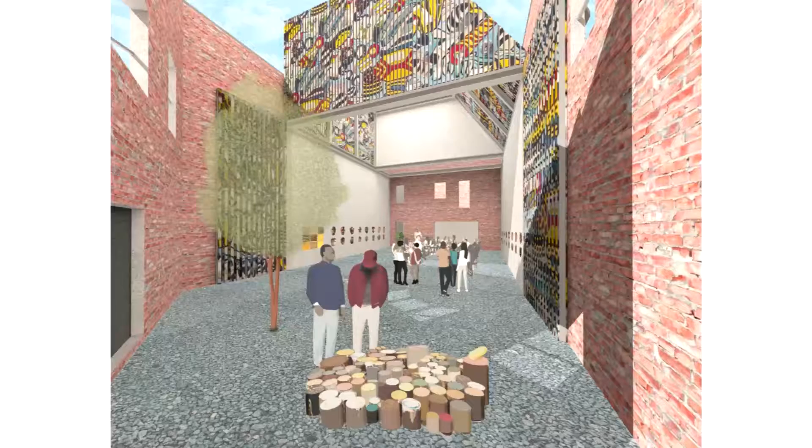For example, this is a museum we're working on in Detroit called the African Bead Museum, an extraordinary project that was falling apart. It was given by artist Olayami Dabls, whose commitment to creating gathering spaces for the community in Detroit to educate them about African culture was extremely important. So we're collaborating with Dabls on this project.

These projects are talking about issues of strategic voids—these void spaces, or open spaces in buildings, whether outside or inside. This is a building we actually implanted in this structure. The roof on this existing structure had fallen down and collapsed, so we cleaned it up, and we're now under construction on this solution we're going to produce. Strategic voids create opportunities for social interaction defined by carved out open spaces. How do you look at it from a different context? This is one of the tools that we use.

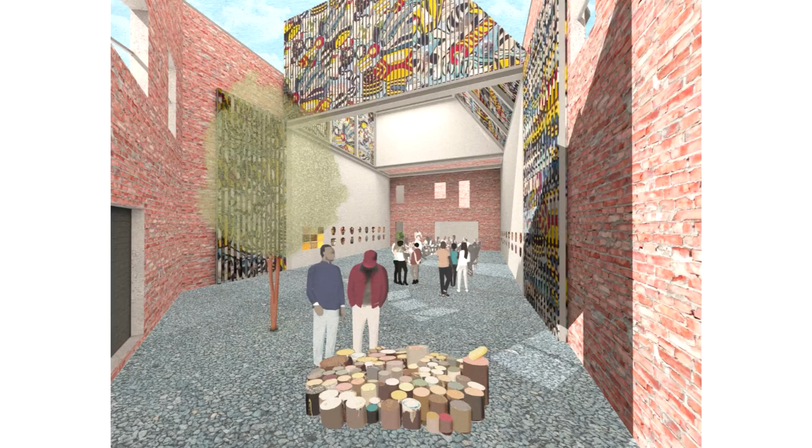Not only are the corners being eroded away, but in the middle of the building we fold things back, we fold the podium down to the street, and these efforts to activate it really work well. When you think about downtown Dallas, or other cities, they have great buildings, but how do you activate it? How do you create an environment that encourages people to come there? Our argument is if you activate it through program and through architecture, that will create a way of enriching and inspired spaces within cities. This is something we apply to all of our projects.

Equally, we look at the idea of unique materials. These are some bus stops we did in the city of Santa Monica, exploring how to rethink the convention of bus stops. Bus stops, in a sense, are hidden infrastructure—small infrastructures that no one ever pays attention to. We think that's an interesting concept, and in a way, a challenge: how do you take a very simple idea of a bus stop and push it further?

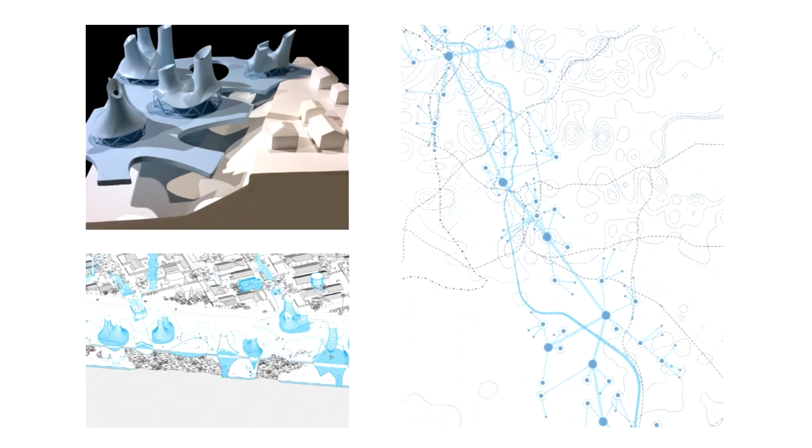I know you also deal with issues of drought. That's always been intriguing to me, to think that Los Angeles is in a drought. It doesn't rain for 5 years, and when the rain comes, they only capture 2% of it. Whereas if you can capture it in some manner, it means you can use it when you have the other 5 years of drought, which is going to come right after the rains.

These are billboard structures. Billboard structures are the ones you don't notice - what you notice is the advertisement. We were approached by the city of West Hollywood asking if we'd be interested in designing the structure for billboards. We thought that was a fascinating opportunity.

So they were quite nervous until Apple approached them and said, 'We love the design of the structure. We would like to have a 2-year lease contract with you. We want to give you $40,000 a month if we can use this billboard structure.' So my clients loved us. So we are now going to quit architecture and do billboard structures. That's one way of engaging Apple.

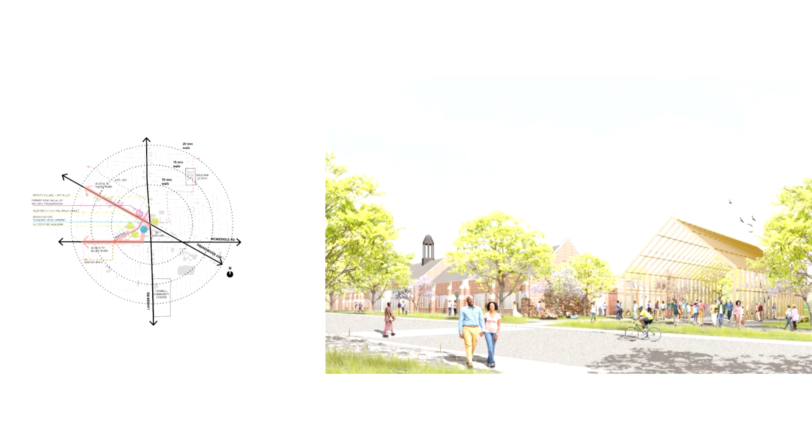Equally, we're doing two different studies for the city of Detroit. They've commissioned us to look at a 6 square mile area of northwest Detroit. Detroit is going through this profound transformation - it's something I'm very excited and honored to be part of. We're doing 10 projects in Detroit right now, and it's been very important to us.

We're learning so much working with people in Detroit, including the planning commissioners, this wonderful man Maurice Cox, who's become a friend and colleague over the years. I know he lectured here a few weeks ago, I believe. Maurice is heading up the planning commission - he's the head planner, and he's looking at this idea of engaging the neighborhoods.

It's a way of reutilizing and reformulating these buildings. Schools are gone. Public schools in Detroit have no money for teachers, so people went south, and now they have charter schools. It's become the primary way of education in Detroit. We think we can bring back some public schools.

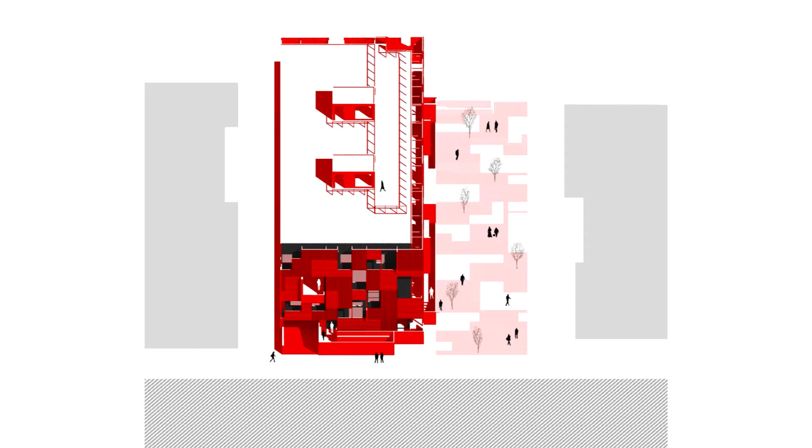With that context, we tackled this project in an unusual way. On the actual site was this existing house. The city approached us and said, look, you have to keep that house—we're getting a lot of pushback from neighborhoods. They don't want you to tear down every house and build housing projects.

We looked at this house and said there's very little architectural significance to it. So we came back to the city and said, look, it doesn't benefit the city—it's a crack house, not a very good location. Neighbors don't want it, but the city wanted us to keep it. So we became strategists and proposed an alternative strategy that they would agree to, so we could remove the house.

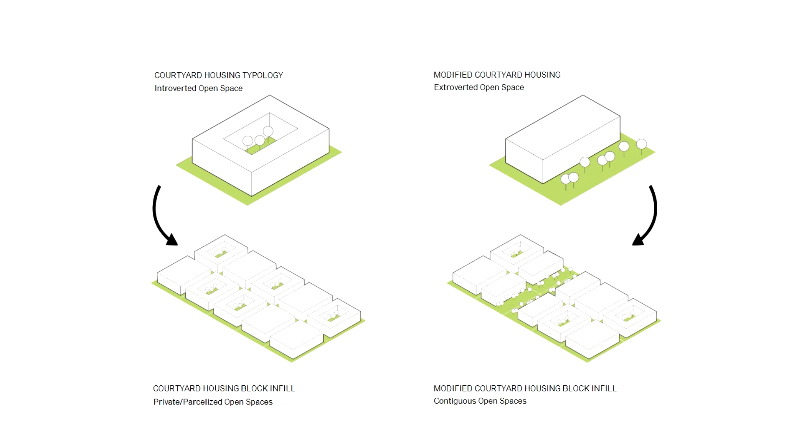You then might have an 80-foot by 300-foot green space swath, which suggests a different way of experiencing the city. It also means you can walk to a park. Most green space in Los Angeles, you get in your car—you go to Griffith Park, the beach, the mountains. You can't walk. So the idea is, can you change that by creating these pocket parks throughout the city? That was our goal. Ultimately, we tackled that idea.

Another issue quite important to me was the idea of context. I don't know about Los Angeles, but context is a strange word—there isn't much context in Los Angeles in one way, but there is in another. We feel that our context for this building was this cafe, a very renowned cafe called Formosa, and it has a personal, sentimental connection to me.

My dad, who was a film actor, used to frequent this restaurant with Orson Welles and John Houseman. He was there in the early Mercury Theater. It was a great time in Hollywood, and this cafe is where all these actors would go to brainstorm and chat about what they were doing. So when I got this commission, I used that cafe as my context, my cultural connection to the area, and the context was color, as unusual as it sounds. That was what drove this project.

I'd also mentioned this intriguing idea: how do you create a pocket park, a public space on private land? And also, how do you deal with parking? Our argument was you can tuck the parking for the private building, which you see on the right-hand side, and then have the park above it. So you can accomplish it—you have this hybrid program of public over private space, because frankly the parking is private, it's for the building, and the park is for the public.

So we approached the city, they loved the idea, and then we had to negotiate with them as to who's responsible. If you have a public park on private land, and the private land is owned by the building owners, but the park is run by the city, what happens if someone breaks their leg, or God forbid, something happens and someone dies? Who's responsible? Well, ultimately the city agreed to take the responsibility, and that was something we ended up doing.

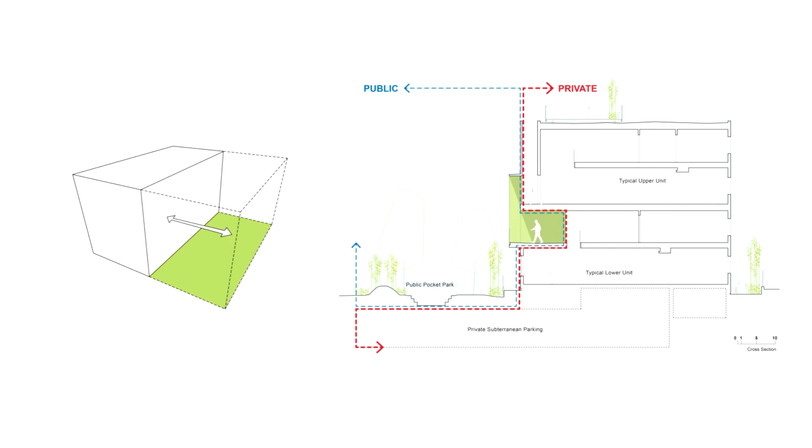So here is the architect as a strategist, an architect coming up with ideas that rethink convention. There are very few public parks on private land in Los Angeles—it's a very privatized city, and people with their own land want it for themselves, they don't want to give it to the city. So this was an interesting win-win situation, both with the city and with the client. He was able to build his 11 units, and from an architectural standpoint it was fascinating to be more of a strategist and not simply an architect.

And that's just a view of the project right there. You can see that we parceled a third of the building for the pocket park, which is for the surrounding community—here's two people walking in it. This benefits the tenants who live on the property, because what they get to look out on is a small pocket park as opposed to a building five feet away. That's the intriguing concept.

How can you as an architect create these opportunities that have a social civic connectivity? How can you embrace the idea of aesthetics? How can you look at context and culture in a different way?

Ultimately, this was the solution. There was a little bit of pushback early on. People were arguing the case: do people really want to live in a red building? I can assure you they do. This sold very quickly, and it became more of an iconic building in West Hollywood right now because there aren't very many buildings.

Not only this color, but also working with the nature of the metal exterior. So this was a very exciting project for us. And there's a view from the building next to it, which also looks at a park.

So you imagine the nature of urban infill. If you provide these 40 by 100 foot green spaces, it benefits not only your building, but the building next to it as well, and eventually the buildings on the backside. So it's a very interesting concept.

We managed to get 11 units. The city allowed the developer to flush out the street level. These type of 4-story buildings, you're supposed to step back 10 feet at 18 feet. So he was able to get one more unit by flushing it out on the exterior. The return was the city got a park, and the developer got one extra unit.

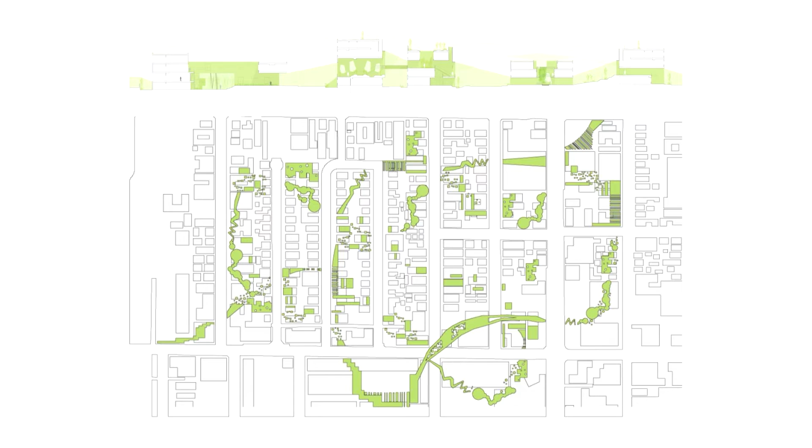The next project is for a developer, a colleague of mine named Jason Reynolds, who is a Dallas developer. Jason hired us in Los Angeles. It's Phoenix Property Partners, I believe is the name of the firm. Jason approached us after 3 years working on this project in Westwood.

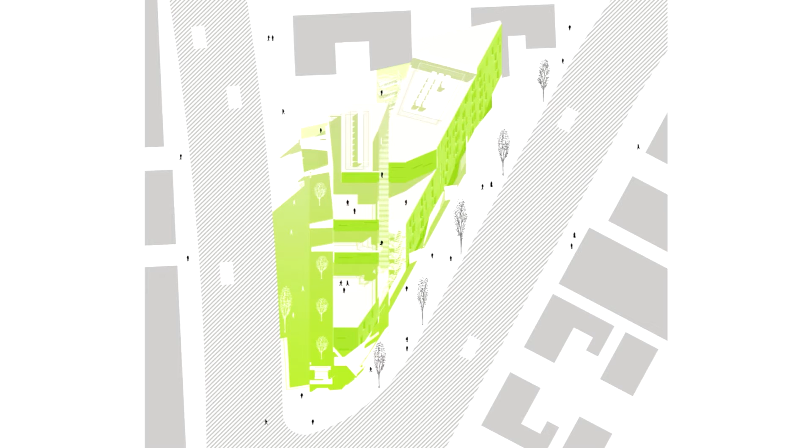It was to be student housing for UCLA. For 3 years, they were stuck in the architectural review board process and the planning. They kept rejecting the previous solution because of one of the key issues of the site—you can see here in a very abstract way, it's a wedge-shaped geometry.

That's the site. And what was most interesting was that there is a historical landmark house by Richard Neutra, called the Strathmore Apartments, right next to it. The previous solution proposed here was a 6-story continuous building. The Friends of Strathmore Apartments, the community activists, fought against the building because they didn't want to walk out of their 2-story structure and look at a 6-story structure.

So Jason tried for 2 or 3 years to get through with the previous solution, and to his credit, he cut his losses, interviewed a number of other architects, and ended up selecting us, saying: can you solve this problem? How do we get approval through our ARB and through planning, and solve what we need, which is 150 student beds?

So our solution in doing that was—here's another shot of the site. It drops 50 feet considerably from one end to the other. That's the site, and you can see on the right-hand side is the Neutra building, right there. This is one of Richard Neutra's multifamily projects.

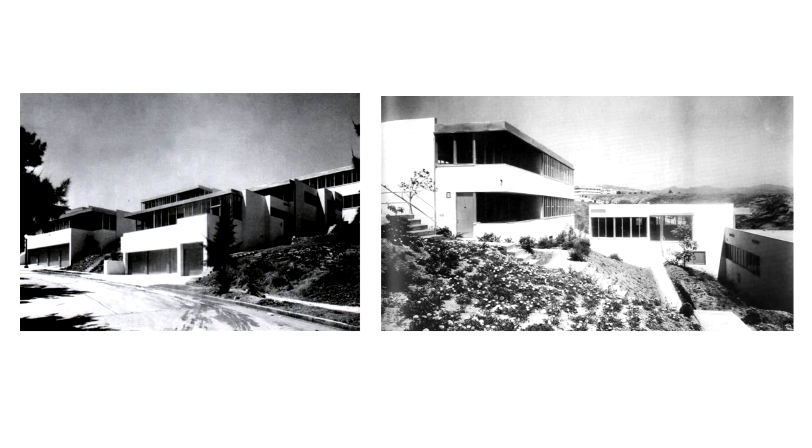He was certainly known and celebrated for his houses, but he was also very involved with larger scale housing projects.

And this was a step massing up a hill, 2-story volumes, and that was the driving force in terms of the massing of what we did.

So here you are engaging, learning from adjacencies, but really honoring this adjacency. If a building you're building next to is good, you can absolutely embrace it and understand what it's trying to do, and build a project that engages and honors that building. So we did that with this project, absolutely.

This one wasn't about color. This is about the massing of the Neutra project. So that shows you the site. That's our building. You can see the Strathmore Apartments.

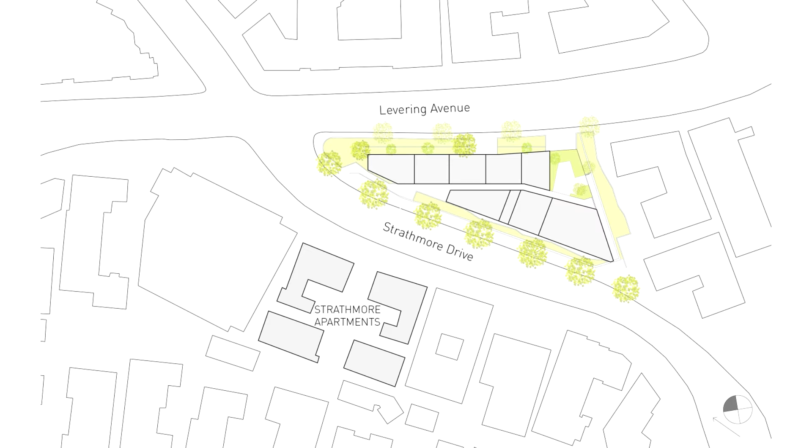So our argument was, okay, our building—when you leave the Strathmore Apartments and look across Strathmore Drive, we have to look at the massing of that building at that particular location and really address the issue of scale. So there you can see the smaller massing was the building. You can see the lower part of the building was next to the Strathmore Apartments. So we developed a scheme that responded to these considerations of the neighborhood.

And the client success—we had to deal with an extensive program of the client. That never changed. The massing changed, but not the program. We solved the problem.

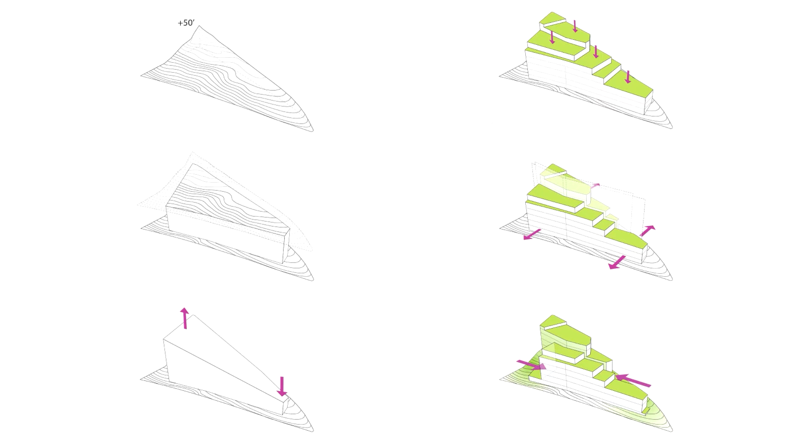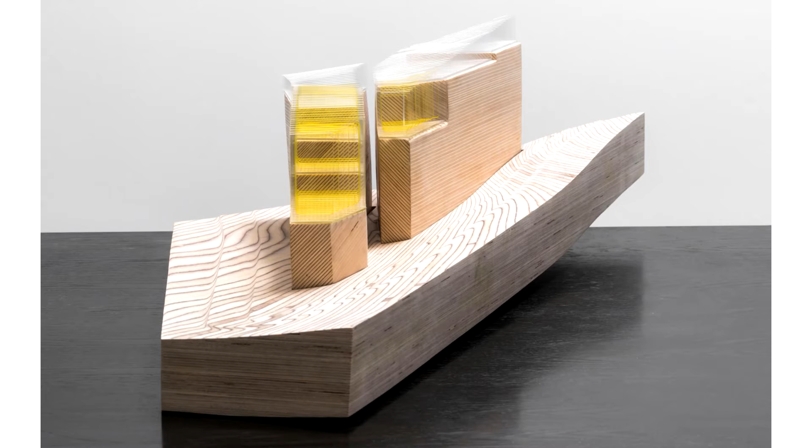And there's another early massing study of the project. There's a model looking at the two massings. We also split the building—as opposed to one large building, we split it into two buildings, two wedge-shaped buildings slipping past each other, so you have access from the exterior for the units.

And that's our building. Now, what's intriguing about it is you can see the Strathmore Apartments on the right-hand side. We were able to solve this problem.

The reason the previous architect was not able to was there was a requirement of a 50-foot view corridor in the middle of the building. So if you can imagine the middle of this building, you had a large cut that was 50 feet, 4-story, and also 50 feet deep—you're losing over 15 or 20 units.

So what we accomplished was we went to the city and planning and said, okay, you need a 50-foot corridor—does it all have to be in one location? And coincidentally, if you reinterpret the code, you can have your 50-foot view corridor but split it into a number of areas. So as you can see, we managed to put a view corridor right in the corner edge of Strathmore and Levering. You can see there's an open space, and on the far end of the building you have another cut. So this was interpreting the code.

So when we did this, they said yes, you can do that. The previous team had not asked the question. So that's also an interesting approach—can you challenge the zoning? Can you challenge planners? Can you reinterpret what they're saying? This was a perfect example of how we did that.

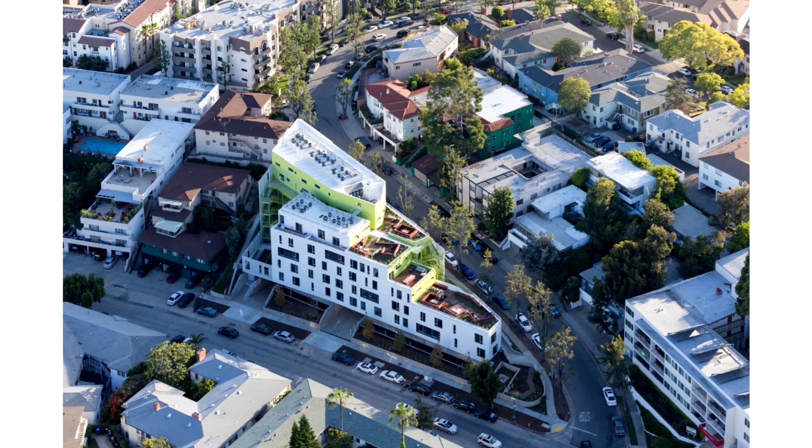Needless to say, we passed 7-0 at the Architecture Review Board, and we built it within 14 or 15 months. So overall, it was a very successful project for the client, and the city was very happy with it as well. So that's one view of it.

This idea of step massing became activated spaces, outdoor study areas for the students. So each level had places where people would come, sit out, hang out, learn, and share ideas. All those issues are very critical, very important—creating these opportunities for people to socialize, to study, and share ideas. This is extraordinarily important for this area, Westwood, where they desperately need housing for students.

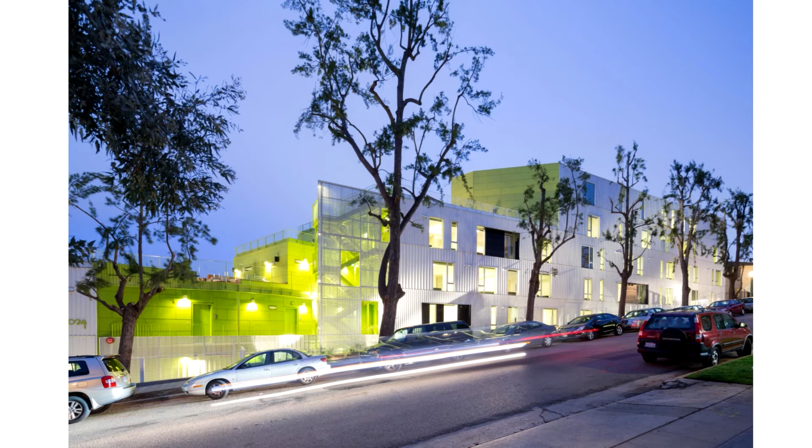And there's another image of it—that's the view from Strathmore Apartments. As you can see, this massing starts as a 1-story to a 2-story right across the street. And then we push the density to the other end, where the buildings are 5 to 6-story. All this came from a reinterpretation of the zoning. If you read it directly, it looks like you have to cut a large void right down the middle, but we felt you could reinterpret it.

And that's just a view also of where the parking is and the building above.

Material-wise, we worked with an off-the-shelf material, a metal, corrugated metal with a more custom profile. Because of the actual scope, we were able to have the company, Metal Sales, create the profile we wanted. We were also able to look at different patterning per level, so each level has a different pattern to the metal.

What's nice is when the sun hits it, which you can't see here, it has multiple shades and shadows on it. So it's an interesting way of working with white. White has the colors of everything, the spectrum color of everything, depending on what you're reflecting and how you work with the sun. So it's a very interesting materiality, metal, and also the color, which played a big role.

All of our cuts into the building, we always think of the argument of an apple. When you cut into an apple, you can change the color or the materiality, so we tend to do that. That breaks the massing down. This one was cement board, so these cuts are cement board, which we painted in 6 hues of green. This was the strategy we used on this project.

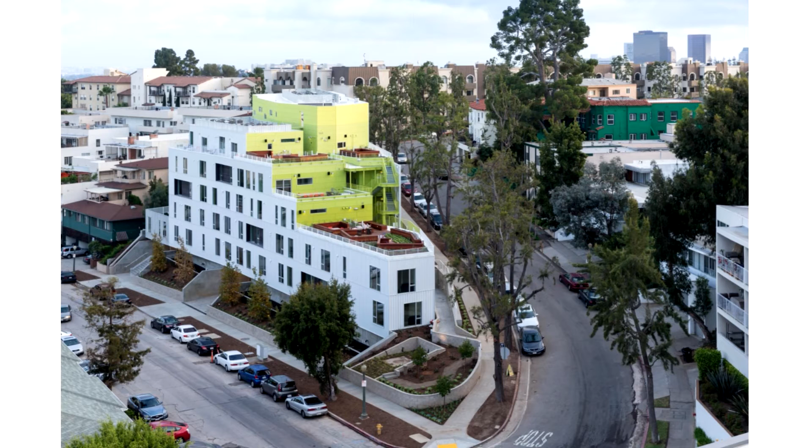The students do like the building. They like to go outside and study as well. And that's just a detail showing the different materials.

Now if one was to ask me, does corrugated metal, isn't that for warehouses? No, it's for everything. It's how you take something that's ordinary and try to make it unique, a little bit more extraordinary. It's just how you approach it. And that really drives our work as well. We do like this idea of materiality and how you make that something unique, and this shows an example of that.

The next project is a project in Koreatown. And by the way, in our office, we work with drawings. We do abstract drawings like this. It's an interesting approach because normally drawings are a means to an end - you draw architectural drawings to produce buildings. We think that process can also include drawings like this. It's an opportunity to maybe discover ideas with it, but it's also, in a sense, a piece of the process, while equally being an end in itself.

You can do a drawing that has this quality, and part of my background is in between working at I.M. Pei's on the Louvre and working at Steven Holl's, I became an artist and wanted to be a painter, and I said I was done with architecture. I couldn't make it financially, full disclosure - I couldn't get a gallery show, so I ran out of money. But those 2 years I lived in New York, I was determined to be a painter. And I felt like, well, maybe I'll bring that artistry to the buildings that I'm doing.

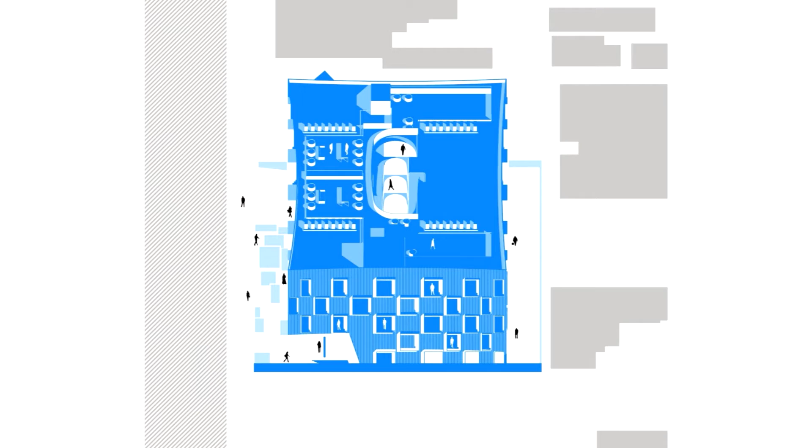There's the typical LA density that you see. You can see where the site is - again, urban infill in an area that's certainly not gentrified. The target audience of this housing project was students and also primarily young professionals making $40,000 to $50,000 a year. They're out of school and applying their trades. They don't have the resources to spend $2,000 or $3,000 a month, so we managed to find a way to produce an architecture to be able to house young people. And that's a view right there of our building in the context of the city of Los Angeles.

And that's the site you can see on the right-hand side. Again, you could look at the neighborhood, the community. It's not an area where there's a lot of money. So we had to design this project for $170 per square foot, which we did. And there it is. It's become a very important building in Koreatown. It's something where people really want to live there. It's a very interesting mix of people.

The roof is very activated, so that's an outdoor space where people use all the time. This one was also the diagram and the partie we did with the 32 units. This is what we ended up doing.

A very simple, but in a way we think a provocative idea. If you look at the first image, it's just a typical square with windows with a cutout for a courtyard. Can you conceivably push in the middle of each of the 4 sides, being very democratic in doing it, and simply create this radius curve on the surface? You can do it if it's metal studs or wood studs. It's not that much more complicated to create a very simple radius or a concave or convex form.

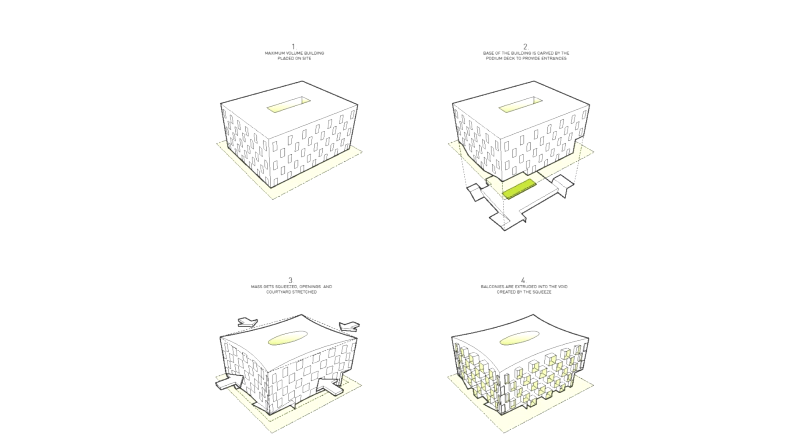It's not that complicated. We pitched the idea, and the client and the contractor said there's no additional cost. We just have to be a little bit more careful, and we have to lay out the studs to create this very slight curve. The benefit of it was we built it very efficiently, which freed up some resources to be able to provide the exterior.

Each balcony and each window had a sunshade and conceivably outdoor spaces. So they grabbed back that equity by virtue of the balconies. So there was this idea, this is a way of reinterpreting how we do these projects. A very limited budget, as opposed to just the box, you do these simple moves.

You can certainly see on the roof line there's a very subtle curve to it. When you're there, you read it very clearly. It also created this interesting opportunity where these shading devices in the middle of the building were deeper, and the ones on the edges were much thinner. So there's that shift, this idea of a subtle idea, but you can actually create a more provocative facade for it.

And there you can see the protruded balconies on either side. So again, you say, this is a facade, this is a building. You can do this. It's got opportunities to look at different ways of addressing this idea of layers and the idea of buildings. There doesn't have to be flatness. You could have this layered effect to it.

We worked with color, of course, white and black, so there was a balance between colors, but that was a compositional thing. But again, patterning is important. The idea of materiality is important. Building efficient buildings is important. We also looked at the plaster or stucco, and we have this kind of grading on the stucco, as you can see. So there's a screed, so we didn't make it a flat, steel-troweled exterior. We had this roughness to it, which is quite interesting.

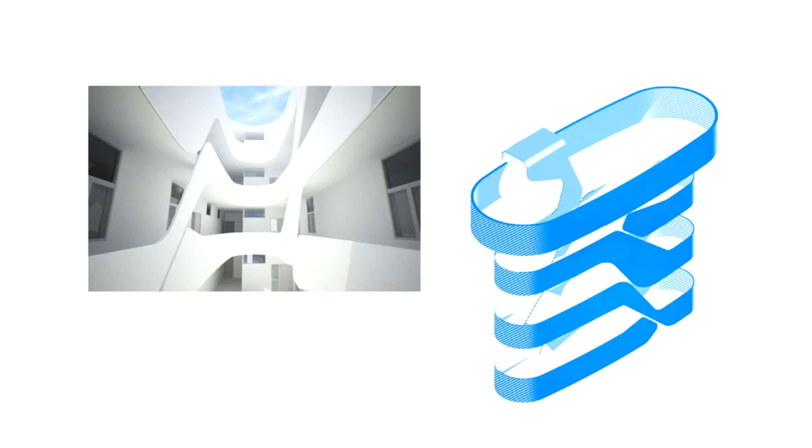Courtyard, we also looked at internally. So the courtyard is carved in the center, which is in a way juxtaposing the exterior. The exterior was concave and this was convex. So the idea was, can you create outdoor spaces in the central courtyard that bring in natural light and have exterior access for all the people living in the building. So there's a view, the built view of it.

So we again challenged the handrail, the guardrail. We thought, well, yes, it could be solid, but can you look at it, and just with plaster, look at a geometry, a formal geometry to it that creates some inventiveness to the courtyard. So that's what we did in the courtyard.

And that's the view on the roof. I would say 95% of the buildings surrounding this building do not activate their roof. To me, it's the fifth elevation. It's something that's quite interesting. You can have wonderful opportunities to do stuff up there, but also the views are great. The actual cost of turning it into a deck or a roof deck is negligible. It's just something people don't do.

So we tend to do roof decks with all of our projects. It's a way of creating outdoor spaces, a common open space. It's a way of creating private open spaces. So it's kind of an added asset to think of it as the fifth elevation.

The other thing, and just in closing on this project, is we feel it's very democratic. It's done with a very tight budget, but all four elevations have the same balance of architecture and artistry, so you don't feel like whichever unit you have, you have to choose the lesser of the units. So as you go through the building, each unit is equally important. That's also important, because sometimes buildings have a front, and you loosen or reduce the value of the others, but we think all four are equally important.

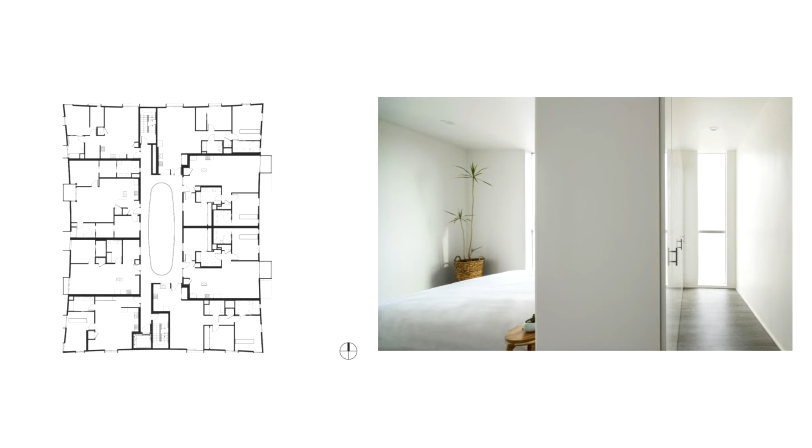The view on the right shows how we split the units, so you can actually have a number of accesses from a hallway to entry, so there's privacy, but at the same time could be a balance. If you have a bedroom in one unit, you have a hallway leading to another unit, you have privacy. So it's a very unique way of looking at it. We have the closets and the cabinets separating these flexible spaces. And that's just the entry. Again, a very small move, but it worked.

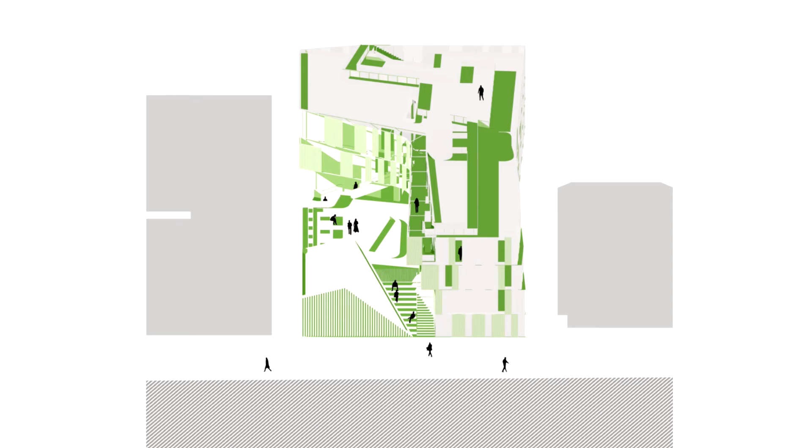The next project is for previously homeless veterans and chronically homeless individuals. It's in South Los Angeles, close to the LA Coliseum, home of the '84 Olympics, and soon possibly the 2028 Olympics, apparently. We've got it, that's what I hear. It's a very interesting area with these larger, important places, and equally so, a number of civic and cultural institutions exist in this part of the city. It's also one of the most underserved parts of the city, with a poverty rate of over 33%, and a college graduation rate of just over 4%.

So this area in South Los Angeles continues to be a challenging area. There's an enormous amount of poverty. This project is essential in these areas. As you may have heard, there were over 58,000 homeless individuals in Los Angeles, and it's growing over 20% each year. So it's really important for LA to tackle this issue.

They just recently provided a new incentive. There's a new proposition that passed where they will provide $3.5 billion for rent subsidies and supportive services over the next decade. That was just passed in Los Angeles. So everyone's paying a little bit more in taxes, but they're going to use that money to finally tackle this issue, which is critical. It's a very wealthy city, but you have very rich and very poor, and people are gravitating to Los Angeles.

And people on the streets, there are families, there's kids, there are people who lost their job. It's not everyone who just has a drug issue or an alcohol issue. There are multiple types of people on the streets. So it's something we have to tackle, and we're involved with 4 different projects of supportive housing, trying to be involved with all that in a very important way.

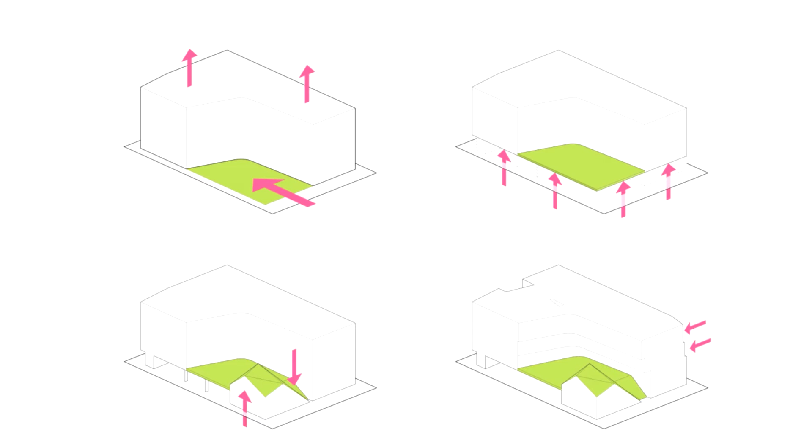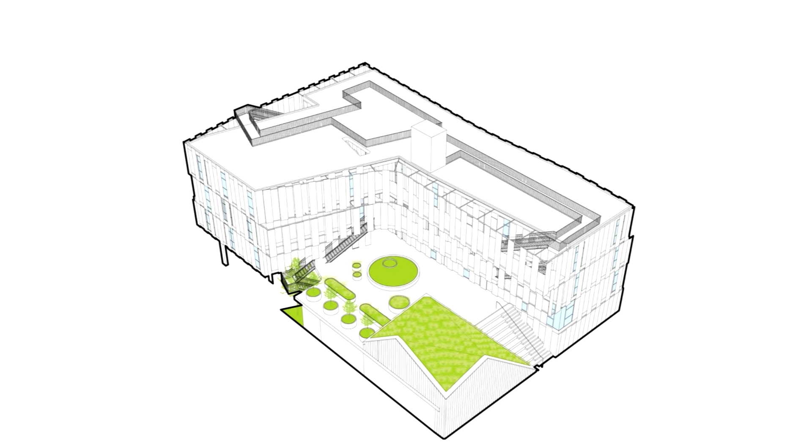These are just a series of studies we did. The volume that's floating at street level is a retail space, and above it is a community space. That's an axonometric of the project. It's over 30 units of different sizes, some for families. If there's a homeless veteran who has a family and he's been pulled away from them, it's an opportunity to bring them all back together, as well as individuals. So it's a mix of a number of types of potential renters.

So this is how we managed to do it, where the parking doesn't drive the solution. It's buried, it's hidden, but you really have this sense of connection to the sidewalk and street. That stairwell will ultimately be used for people to sit and hang out. We didn't put the fence there, we pushed it to the top, so you can imagine people sitting there and talking.

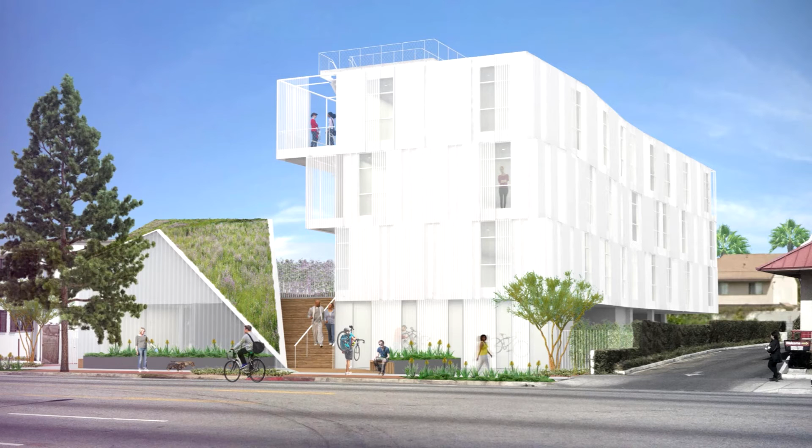So this idea of really engaging the city is extremely important, not only for homeless projects, but also market rate projects. And that's just a shot where we'll be finished, probably June or July, sometime in that time frame.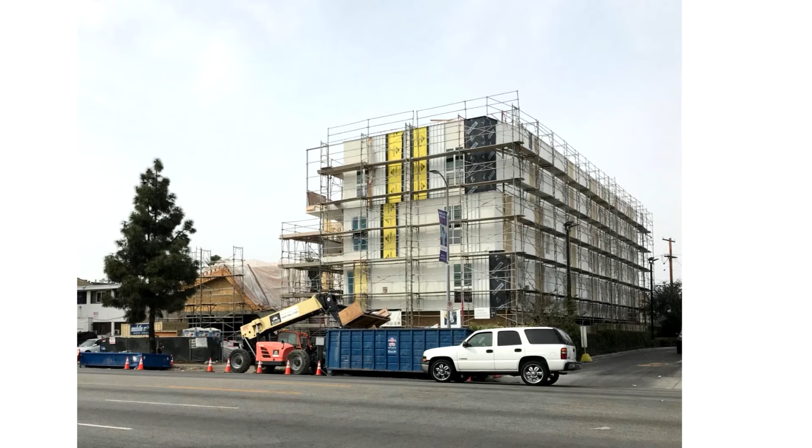So that's a view of the building from the street, and some more details of the corner edges and the courtyard. Again, it's a homeless housing project, but in terms of the value of the design, there's not a great difference between this, the Mariposa project, or the Formosa for that matter. It's all the same ideas.

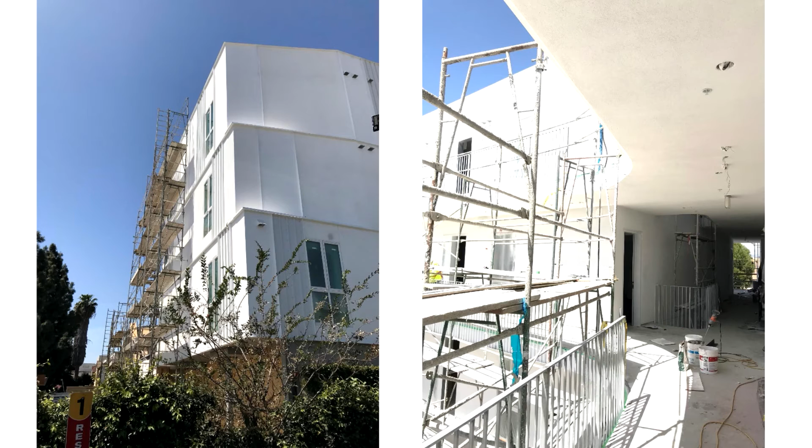Economically, they're the same range of cost, and we think there needs to be this understanding. It's critical to make sure that architecture is for everybody, across all socioeconomic levels.

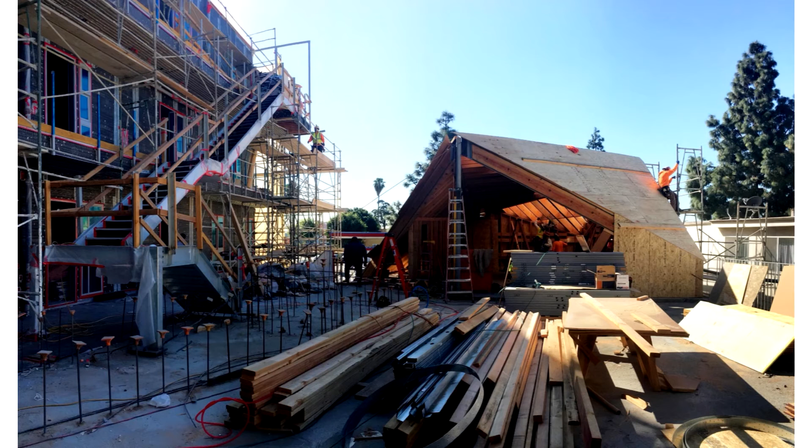The next project is also fascinating. The housing crisis in LA has created an immediate need for the city to figure out a way to house 50,000 homeless. So the city has developed a new program where they've identified and released over 1,700 city-owned properties.

For affordable housing developers. Now, the sites are challenging. There are areas that are leftover space, and land is at a premium in Los Angeles. The only areas you can really find are next to freeways, or areas like this one, which is right next to the largest freeway interchange, coincidentally, in the world — the 110 and 105 freeway. That's the site.

So this whole program with the city is trying to find developers willing to buy these properties and provide housing. All those issues are critical — it is a challenging site. How do you create housing right next to a freeway, when you think of air pollution among all the challenges you have? So we took on this challenge when we were approached by the client, who said, 'We'll help you work to figure this out.'

The other issue was that these projects take 3.5 years from inception to completion — the process of getting 14 or 15 sources for funding. It takes forever to get tax credits; if you don't get it one year, you wait a year to get the tax credits the next year. So all these things became a critical issue of the project.

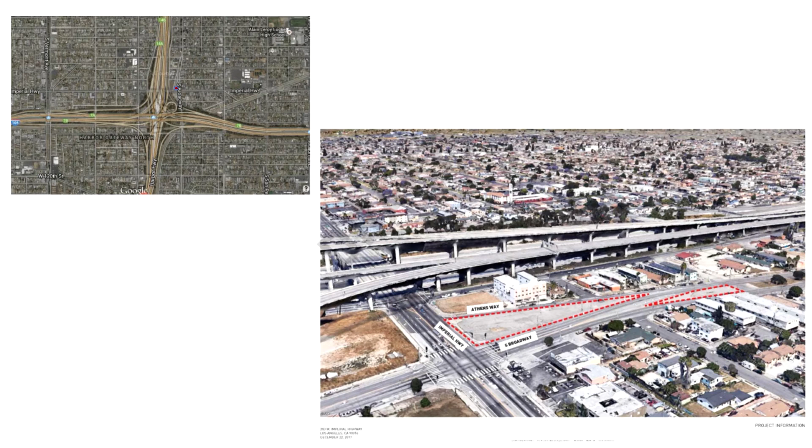So we, as strategists on this, thought, okay, we're going to figure this out. The first thing we looked at was how are we going to deal with this very complex site, which is not exactly the most ideal spot.

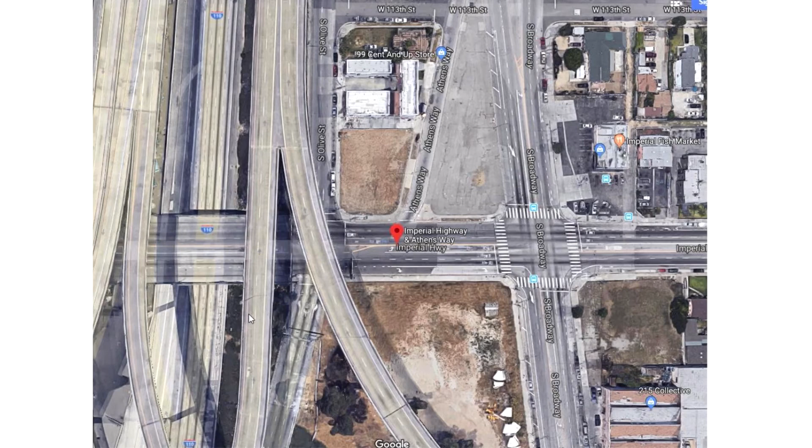We decided that the first thing we're going to do is compress the time it takes, because if the client buys the land, he doesn't want to carry the land for 3-4 years. So we proposed an idea we've been developing, which is shipping containers — there are containers we're going to be working with.

So we've done our research, and this is the critical issue about working with containers. You certainly have the typical design and approval process, but can you compress the 3.5 years and the whole process, not just construction? Normally construction takes 18 to 20 months for these projects, just because of the nature of prevailing wages and the process of building in Los Angeles.

So if you have factory fabrication and you're fabricating the containers, which already have the drawings to do what they need to, can you also do grading, preparation, and foundations at the same time? So you have that hybridized time, then you ship it, and your installation for these projects is very minimal, because it's all built and you're just stacking it. So you compress the installation. If you can imagine, you have maybe 7 months for factory fabrication, grading, and preparation at the same time, and 1 month to ship it.

You have 3 days. That might be a little bit optimistic. What's that word? Ruthless optimism? Yeah, okay, so let's say it takes 2 weeks.

Then you install it, and then you have 2 to 3 months to landscape. But you compress that, you're talking about 7, 9, 11, 14 months. The 7 months is happening at the same time as grading, so you're going to compress and save at least a year in doing this process, instead of waiting and having done the grading, preparation, and foundations, which will take 6 to 7 months, and then you build it. You're hybridizing the two, so you're saving that 7 months to start with.

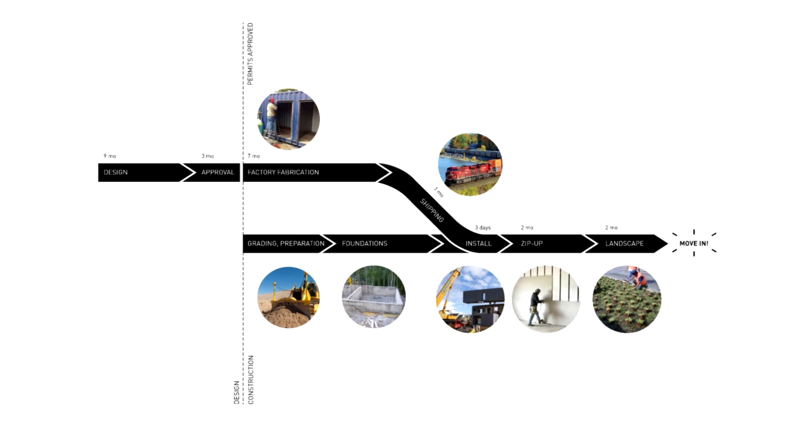The installation of containers is only 3 to 5 days, so ultimately the client felt we're saving at least a year in this process. That was what drove the project. So they bought the idea, the city bought the idea of containers. They thought it was an intriguing idea.

The other thing we had to look at was this issue of how do you deal with air pollution. So they vacated this Athens Way, which was an alley. That alley became a screening, a veil, a landscape buffer to create landscaping, so the toxic air from the freeways, or the challenging air, can be filtered by landscape. In a way, thinking of the building more as a breathing lung, but also trying to protect the building from those issues. So the city vacated this alley to give us this opportunity.

How do you create permeable surface? How do you grow trees there? All those aspects played a role in this, so we do have that going on with this project.

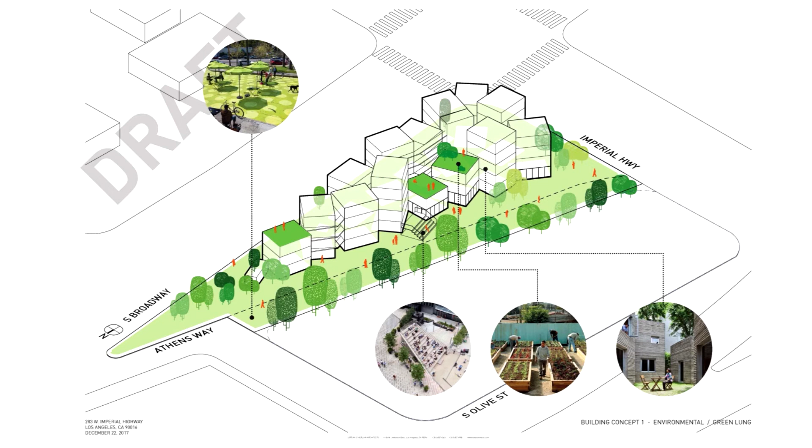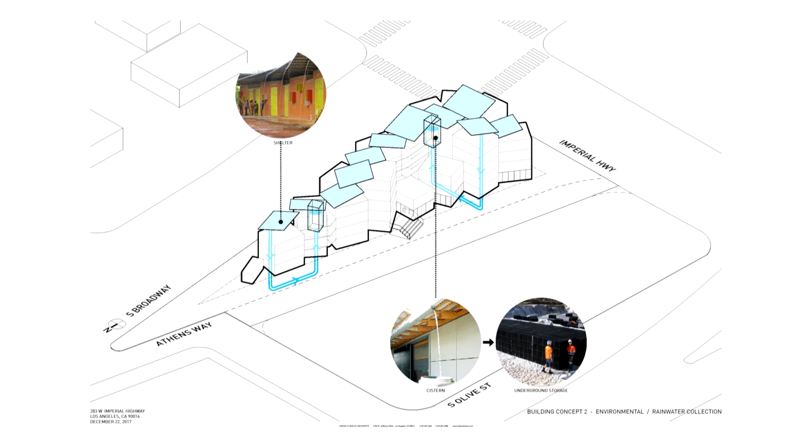We also looked at this issue of water, which is equally as important to us. So we are working with this idea of rainwater collection, very important in Los Angeles. Here we are doing homeless housing, looking at rainwater collection, and we're looking at solar panels. So here we are hybridizing infrastructure and housing and providing solutions for the homeless. This is the way that we think architecture can play a bigger role in the city.

This project is in the early stages. We're going to start DD, design development, pretty soon. Now I'm going to just show the next 2 or 3 projects. They're master plans in a building we're doing.

This one is in Detroit. I want to talk briefly about the experience we've had in Detroit. As you know, Detroit and LA are vastly different landscapes and conditions. We always think of Los Angeles as a place where you create these projects in dense urban infill lots. That's the nature of the city—it's already built out, and you have these opportunities to infill lots.

In Detroit, it is very different. We're faced with a unique scenario of an inverted figure-ground relationship, with dramatically underdeveloped neighborhood fabric. We have burned out houses that have been cleared out, we have fields everywhere. So how do you design in a city where half the city is not there? That's the challenge we've been having with our projects, but we're learning from it and trying to look to the future, thinking about how we create buildings that could act as a catalyst to help and encourage more development in the future. That's the role we played.

The other thing I learned from working in Detroit, which has been very interesting, is they're very much interested in social priorities and working with neighborhood groups. All of our projects in the neighborhoods in Detroit are something that's very unique. In previous periods of Detroit, all the work was done downtown, with the hope there would be a trickle-down effect into the neighborhoods. It didn't happen. It never has happened.

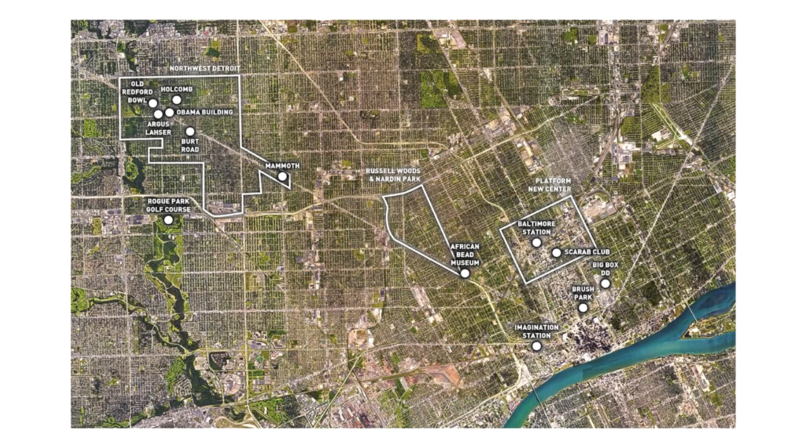They're all on the edges or perimeters of downtown, or some very far. We've done two larger studies for the city. Next week I'm going to present again for this place called Russell Woods and Nardin Park, two neighborhoods. One is very distressed, the other is a little bit better.

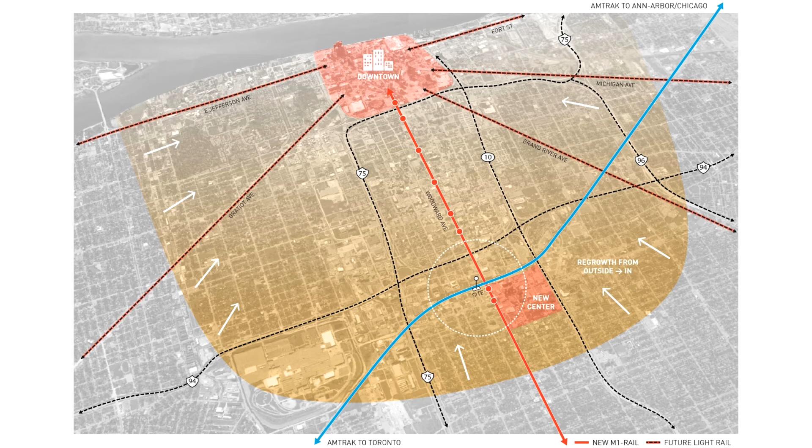So we're also tackling large ideas in Detroit. This project is called Baltimore Station. It's with a developer named The Platform, a very interesting client. You can see the relationship of the site to downtown. It's right next to the Amtrak, and also right next to the new M1 rail that takes you right down to downtown Detroit.

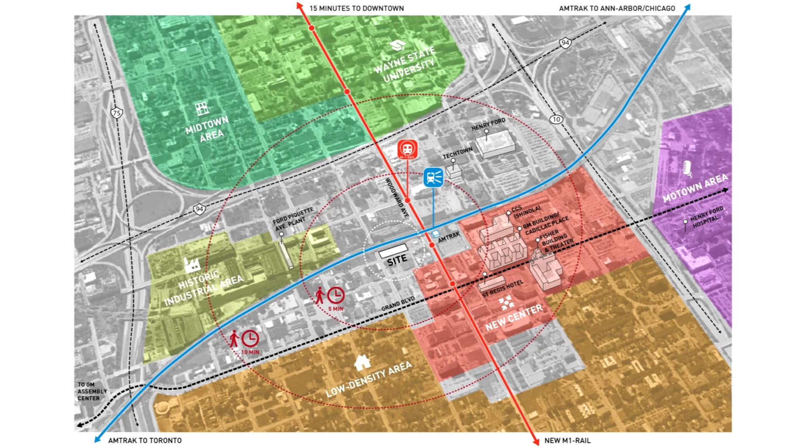So the site is right next to all public transit. That's critical because people don't always have the resources to drive places. It's right next to a confluence with Wayne State University, Motown, a lower density residential area, and an area called New Center. There's also a strong, fascinating historical industrial area, which houses the Ford Piquette plant where they built all the Model T Fords.

This represents our study of what we did on the project. This one is also fascinating because it talks about how you create an incubator as a building - how do you create an architecture that will embrace Wayne State University?

The co-living component of the building, a third of the units, is essentially just a sleeping room, and you share a living, dining, and kitchen area. It works for students. The chancellor of Wayne State University was excited about it because he felt that students, when they leave school, go to their apartment and close the door - there's no engagement. So the idea of co-living, where they have to walk out of the room and share a kitchen or living room, is very important. That drove this idea of co-living, and we collaborated with Wayne State University on that.

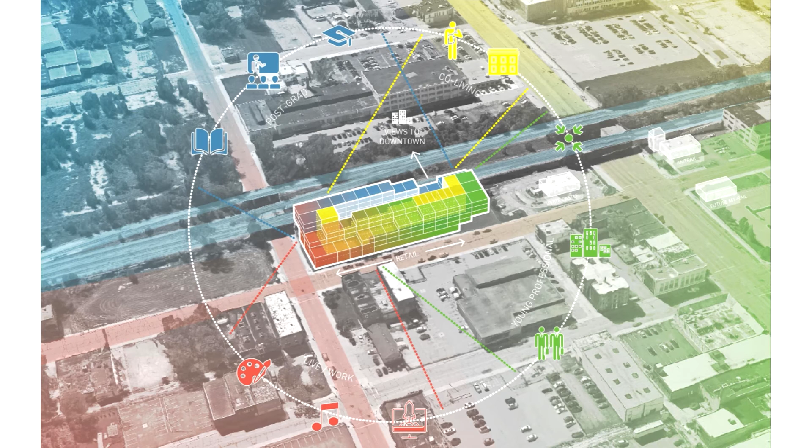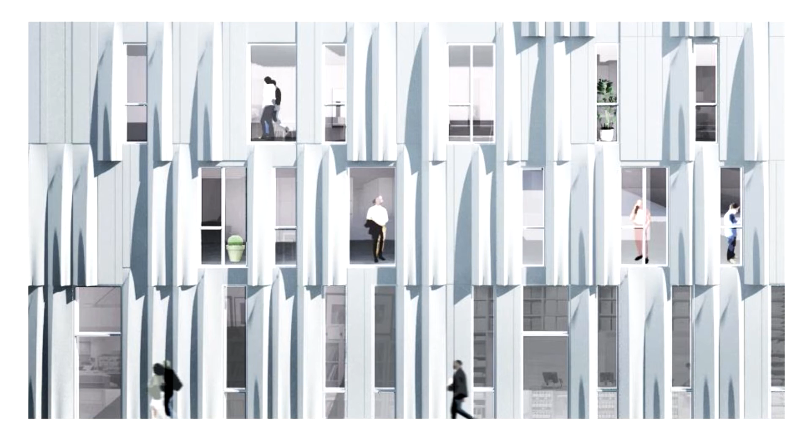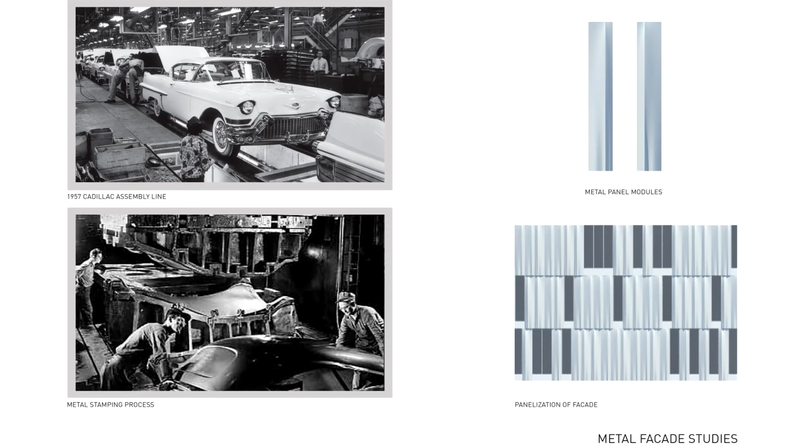What was really exciting is that this is a detailed project using sheet metal panels for the exterior envelope, utilizing the metal stamping process used to manufacture car body parts - another cultural, contextual link to Detroit. We're working with a company that normally does metal stamping for the assembly line to work on the facade. Why can't you jump across boundaries and work with companies that build shells of cars? The result is this panelized facade, which is highly unique - and yet it's a co-living project being built for $150 per square foot. These people had no issues building these things.

They do it all the time. In fact, they saw it as one of the easiest things they had to do.

How can they create formwork for the patterning of the 2 metal panel modules? In this project, we worked with these 2 metal modules, but depending on how you lay it out, you get this result. To me, this building looks like a curtain. It's a unique thing, a metal curtain, but it has this opportunity to rethink the idea of layers and the facade flatness of buildings. We start to create depth.

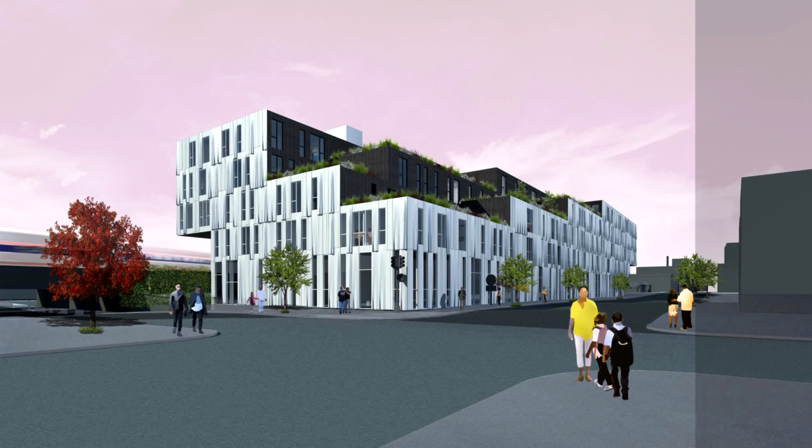And there's the project. We're under construction on this right now, so this is very exciting. Hybrid programs—it's art related, it's co-living, it's got all the different essential things you want for a very strong, dynamic, important project in Detroit.

The final 2 projects I'm showing are what we're now doing next. So what we're doing next is jumping scale. We've been commissioned by not only North Carolina but also Florida, West Palm Beach, to look at larger projects and finding ways to activate it. This project is in

West Palm Beach, in an area that's industrial. It's not Palm Beach, but it's next to it. It's an emerging kind of area—industrial, not as gentrified as Palm Beach, but it's got some emphasis. It's got essential things needing social and civic connectivity. Right now it's an industrial area.

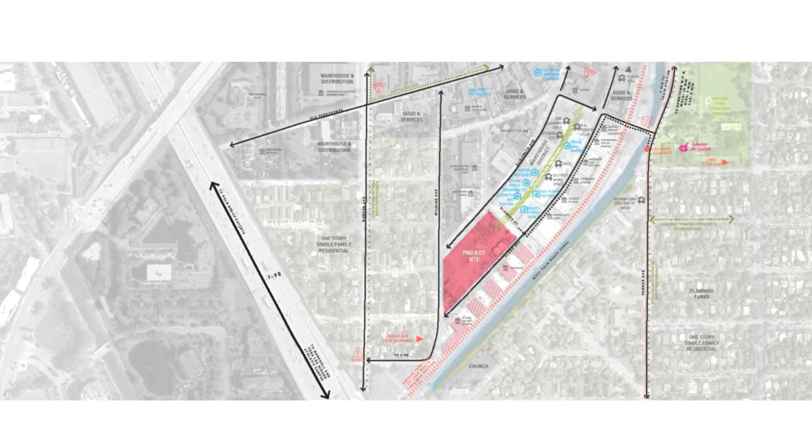There were a few of it. You can see the site. As you can also see, there are a number of industrial buildings adjacent on both sides. And there's a view—you can see it's another area that's not necessarily an ideal place to think about having housing, but this one's important.

It's a very interesting area where all these warehouses and industrial areas are starting to change. They're starting to become more activated. I think there's a number of—what's it called—with the gym. Yes, that one. They've got all these programs coming into the area.

So we looked to the context and recognized that the residential area is much lower—it's 1 story. And certainly the warehouse spaces are also 1 story, not big. So we came up with a parti for the building, which is about 170 units, pushing down in 2 corners that engage and have relationship to the smaller adjacent buildings, and push the density again, which is what we did in Westwood. The ideas of amplified urbanism were applied here as well.

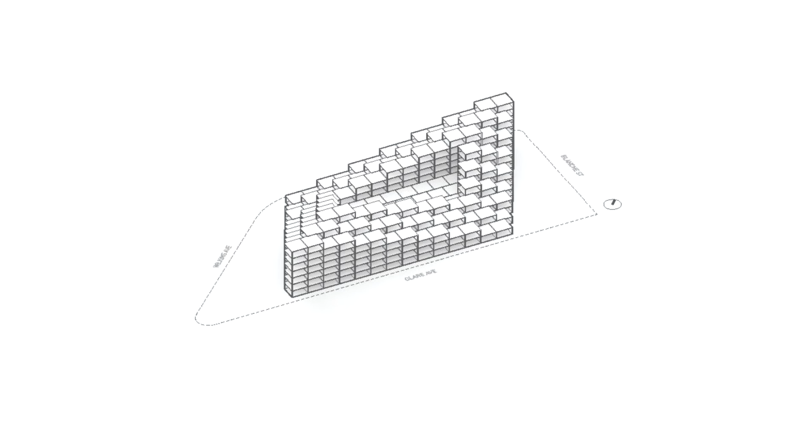So this is a project we're now in design development. Coincidentally, the client was someone who saw our work and said, 'Can we apply some of the ideas you're doing in Los Angeles here in West Palm Beach?' So I flew out there, met with them, brainstormed, and this was the parti we came up with that we're working on right now. There's a section through it.

Based on the budget, we had to have above-grade parking—they couldn't afford to dig down for subterranean. So we're convinced that over time, parking structures and the need to park are going to go away. People are going to do public transit, ride bikes, walk. So we designed the parking so that over time we can carve out light wells to bring in light from the central area, which is open, to bring light down there and conceivably change the program.

It could be a gym, it could be some other amenities. We think it's very important to think about everything you do having flexibility and seeing how it could change. When you think about all the buildings that are built and all the parking designed for those buildings, think about it from a developer standpoint. What if all that was revenue generating and not just parking as required by the city? So you can comply with city requirements, but over time, perhaps 20, 30 years from now, that's going to go.

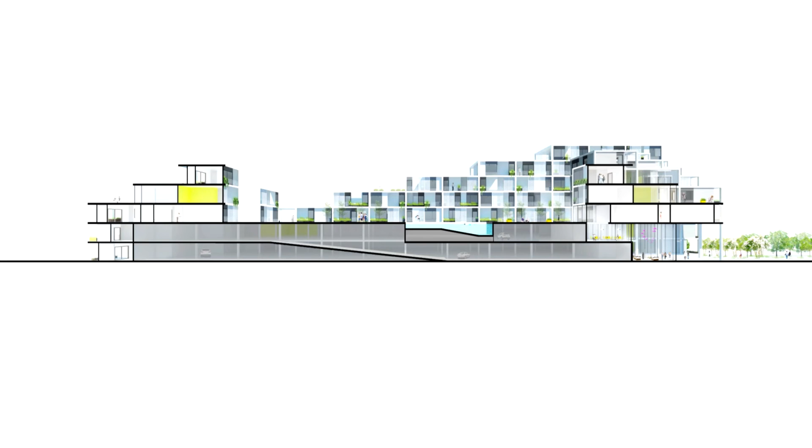It'd be interesting to think of parking as something you're investing in these buildings. Can you create spaces that accommodate parking now as per requirements, but 20 years from now, when the requirements are reduced significantly, can you reformulate that space? That's what the idea is in this project.

There's a view of it right there. Our client also works with concrete, so this is a concrete building, essentially a moment frame of concrete. You can see that all the units are stitched into or embedded in this grid structure.

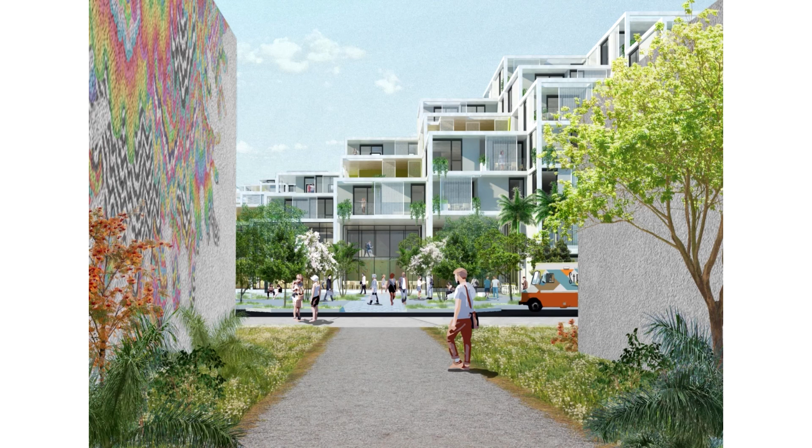We also opened the edges and activated them for an open space on this corner. Part of the reason is that it connects to the next door neighbor, which has this paseo that comes through it. So this is a way of connecting adjacencies and seeing how what you're doing relates to what's next to it, continuing this idea of making cities work better.

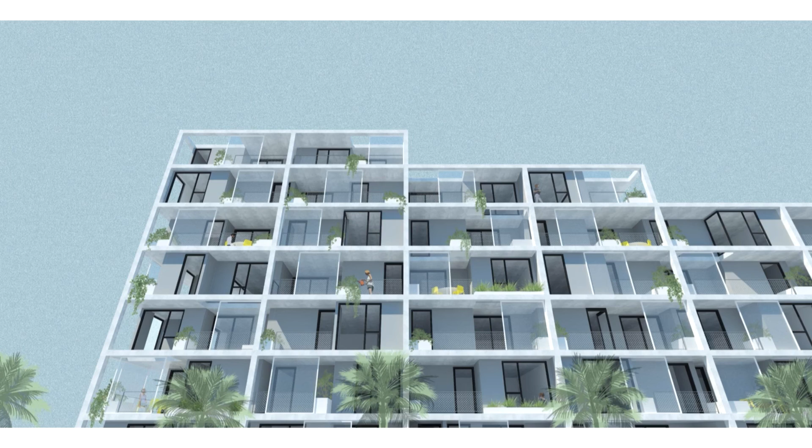That's just a detail of the facade. We're looking at ways of materiality and lightness, but architecturally this is more rational. You can also bring aesthetics and ideas to it where this starts to work.

All the roofs conceivably could be used. We're being more strategic about how many roof decks we have on this from a cost standpoint. It's an area that doesn't have an enormous amount of money, but we're doing this for a very limited budget.

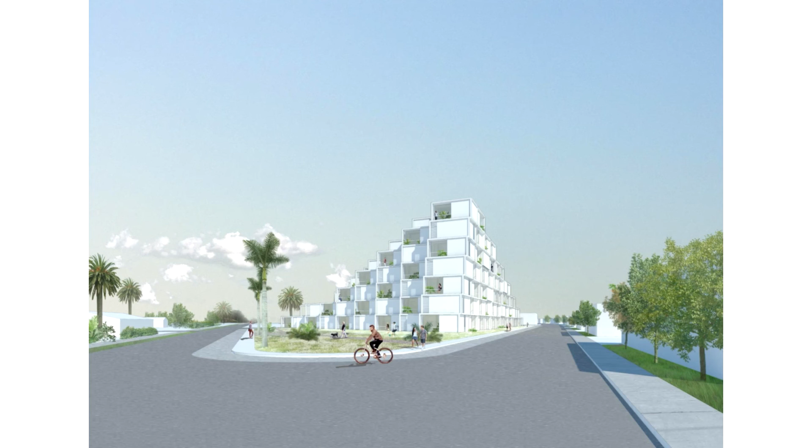And that's another view where we pushed the density to the corners, which made sense in that area. In this particular area, the residential area is on the left-hand side, so we took the massing and stepped it down toward the residential area, with the density next to the commercial buildings or warehouses.

It took over three months of working with the mayor of Raleigh, all the planners, and our clients, making it very much a pedestrian relationship to the site. We tucked the parking and the driveway over on the north, the west side, which is 50 feet higher than the other end, so we tucked the parking underneath the higher area.

We also created a really strong pedestrian relationship, not only to the creek that exists on the site—we engaged that by virtue of the buildings—and then we stepped back in terms of the height. So in the section, the first step is a hybrid between residential, work, and play.

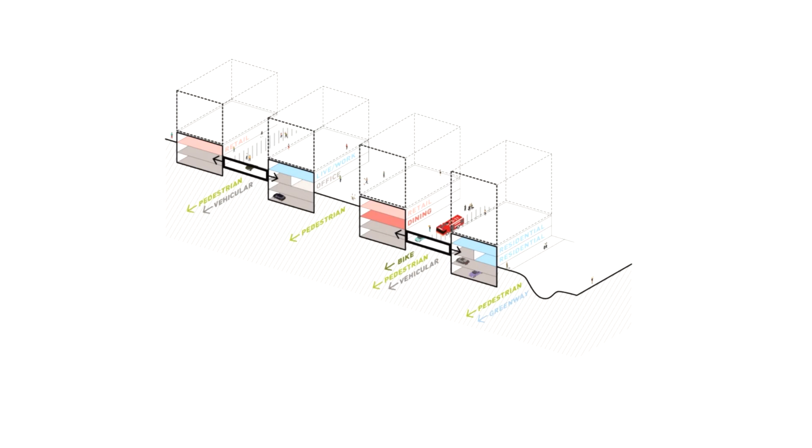You have vertical buildings, and in between, areas for pedestrians. You activate it with offices and live-work space. You have dining and retail, so the edges are programmed in a certain way, and then you go vertical where you have the housing, while also providing opportunities for bikes and pedestrians in addition to vehicles.

This whole project was intriguing because if you can start early like this in terms of master planning and zoning, you have a better opportunity when you finally get around to building, because sometimes architects are just given a master plan and told 'here's what's been approved, work with it.' But if you can get involved early from a design standpoint and provide opportunities like this, it makes a lot more sense, so when you get to building during the phases, you're in a much stronger place to start with.

You've got something that's very activated, an area that's connected from a social standpoint, and you want people to come here as a destination. That's extremely important. For us it's very exciting to be part of this process, which we're doing now in Detroit, West Palm Beach, and in Raleigh.

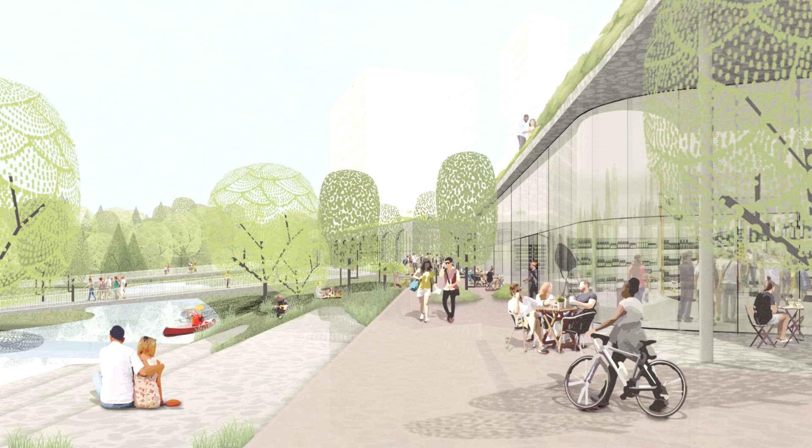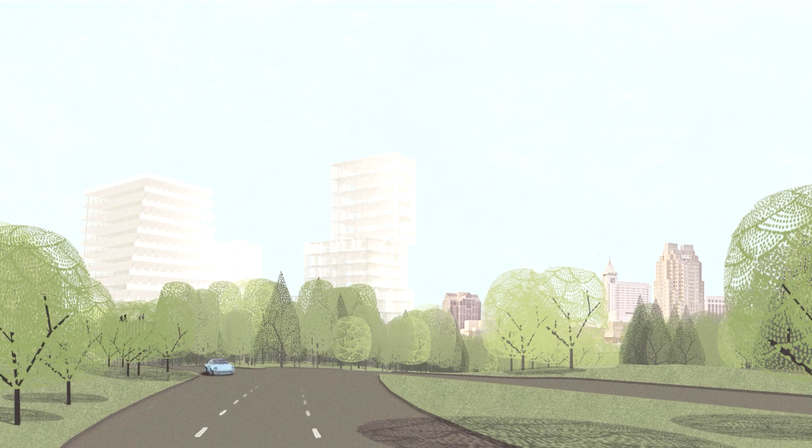Raleigh, North Carolina. There's another view of the creek and our early studies and our presentation to the mayor of Raleigh. This is what we presented, how we're thinking of activating the retail area. And this is another view from the major streets. So this is a gateway to Raleigh.

You can see the buildings we're designing are right now conceptual, but we're thinking about them as being somewhat unique. Right now they're ghosted out, white buildings, but one can imagine formally that each one could be different. Part of the problem with these master plans is that all the verticals look exactly the same. But if you think early about this, you think this is an opportunity for this type of building here, here's another one. We have the vertical ones positioned strategically to have views of Raleigh.

That's a way of activating the ground plane, activating the retail area, and having the towers each designed so view corridors toward downtown Raleigh are there. That's why the geometry of the buildings is shifting—it provides that the building behind it has a view corridor to downtown Raleigh. So it allowed an opportunity to do better architecture, but also made it more interesting formally. That's the way you take advantage of constraints and parameters.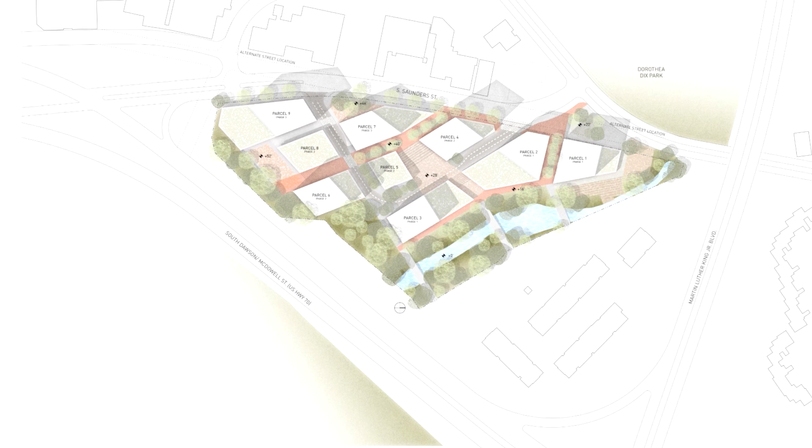I just want to say, we do believe that as an architect, we can be equally part of the conversation, and that's what interests me. Sometimes we're at the end of the game—everyone's worked it out, the city is zoned certain ways, you've got developers that come in with their numbers, and it has to pencil out. If the architects are involved early, they can play a role, they can have a voice. And it is a conversation, a dialogue, and we push for that.

So when clients come to us and say, well, we're working with the city on these issues, we ask, can we join you for that conversation? And the city likes it because we might come up with alternative strategies that work. Right now I'm on a think tank, a pilot program with a number of those 1,700 lots that are really challenging, next to freeways and other very complex sites. We're part of that conversation with the mayor's team and also with the city controllers who own the land.

It's very interesting to do that. It's something that drives my work, something that's exciting to me. So that is the key issue: the architect is a strategist. It's not simply someone who produces a product based on being given the opportunity to design a building. We think it should go further than that.

All the projects are different scales, but they do present our commitment to shaping architectural impact on social conditions through our work. There is a way—you have to hybridize it. You have to have aesthetics, political, social, smart thinking, and smart design to produce all this work, and we feel that's essential. We look at housing and how it impacts communities socially. We think it's critical to have it civically connected, and aesthetically it has to connect. All these projects are important for the fabric of the city.